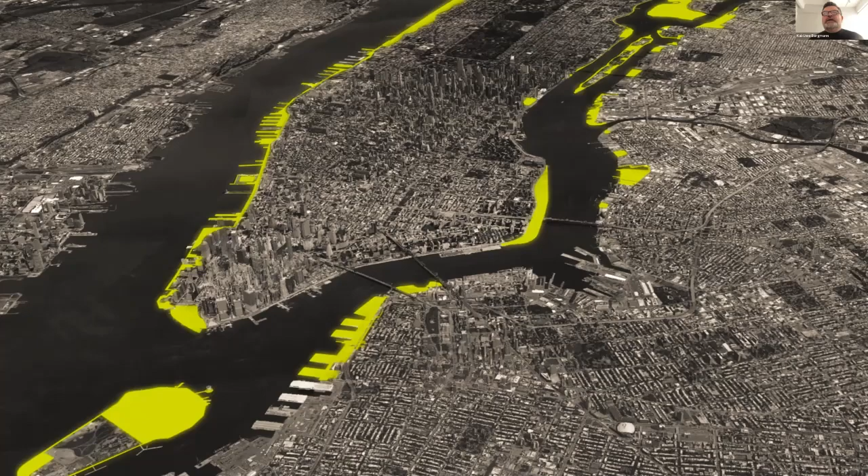Many of you may remember eight years ago when superstorm Sandy hit the city, knocked out power for many New Yorkers, and caused $20 billion of damage. We have since been asked to help design and protect the city against future storm events and climate change, so we designed a project called the Big U.

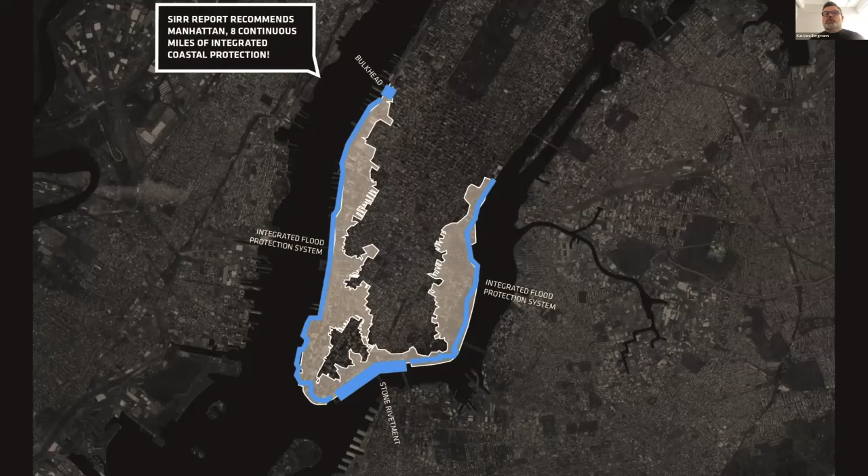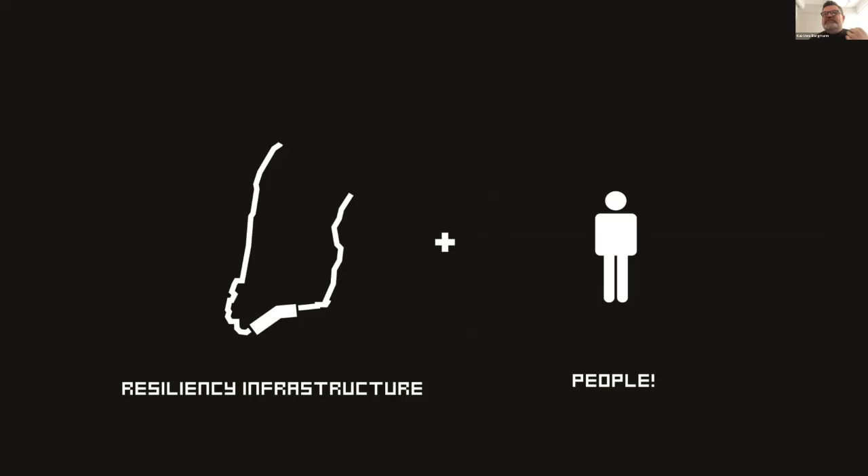Instead of only thinking of this as an engineering exercise of keeping the water out of the city, we want to think of how the infrastructure can also include the humans, the scale of the human, the activities of the human. So we call this social infrastructure—infrastructure that is keeping you dry, but also allowing you to enjoy life and increase the quality of life of the citizens.

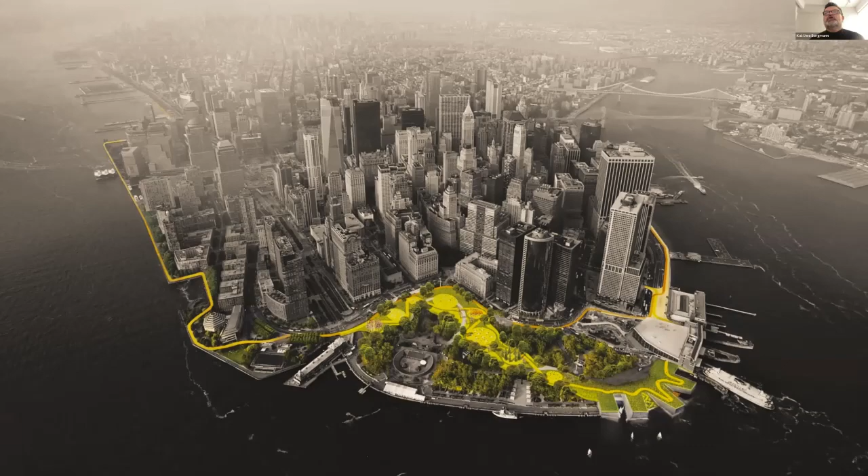Our proposal, which is 10 miles of protecting the New York waterfront, is also about enjoying that life. You can see here with the bike paths, with the park, with the rising berm which is protecting you against the sea. That is now a new way of actually engaging the waterfront, one that protects you against those events that occur from time to time.

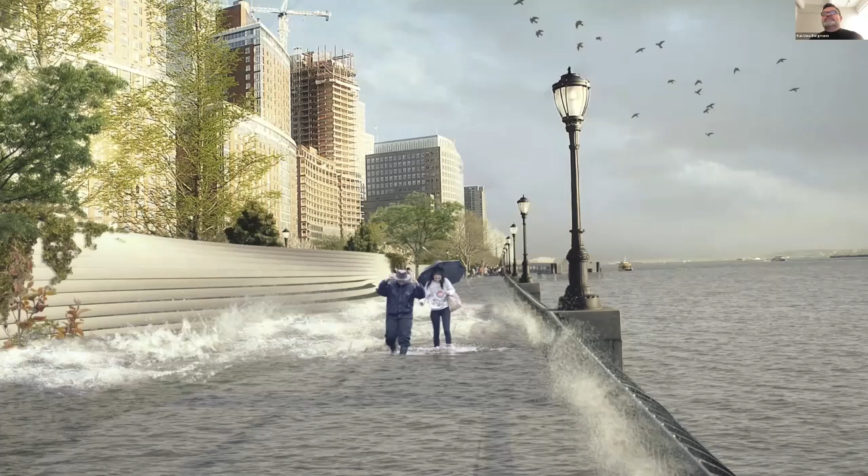And New York has actually, over the course of the last years, put this plan into place. So I'm very proud to say that the first 2.5 miles of the 10-mile protection is starting construction, and the city is making the investments in that future.

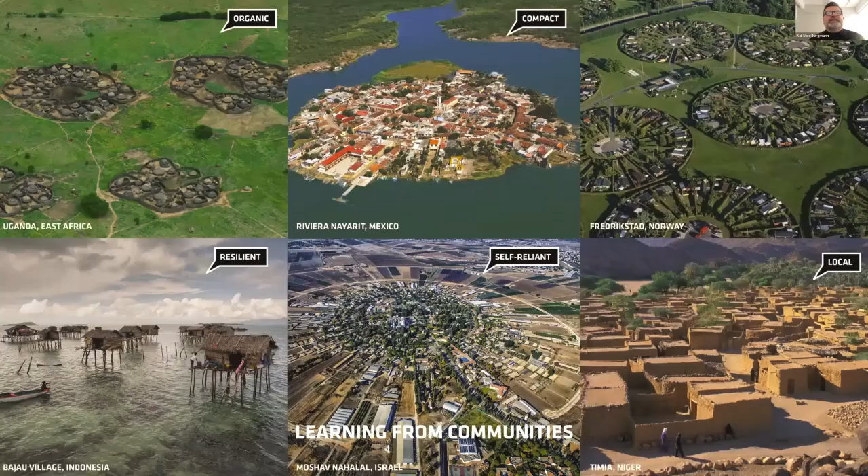We can learn a lot by looking around our cities, including Indonesia's Bajau village in the lower left. We can also learn a lot from nature about how to store water, how to passively evaporate water, and so forth. Inspired by the 17 Sustainable Development Goals from the UN, we started to think about how we can begin to imagine living on the water. When you start thinking about that, you have to think about the waste systems, the fresh water systems, the food systems. So by starting with a person, we begin to look at all of the things that are required.

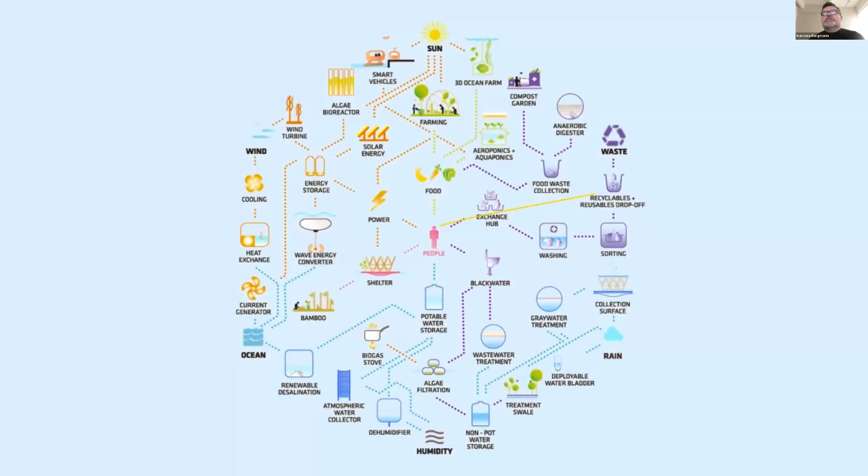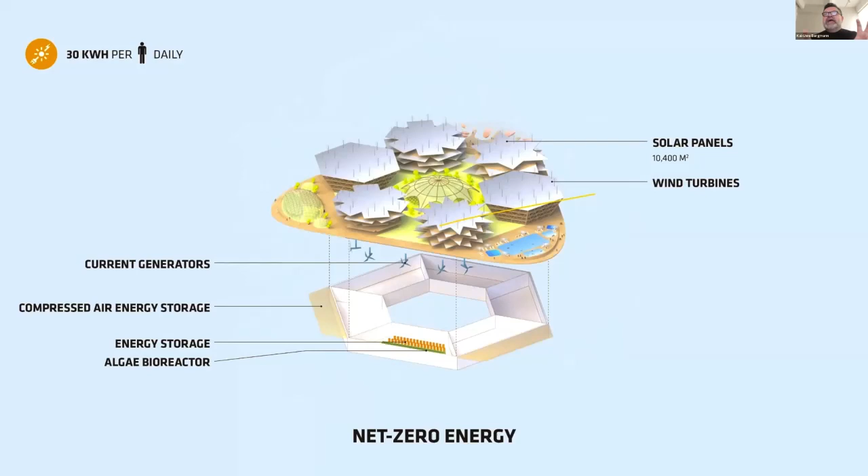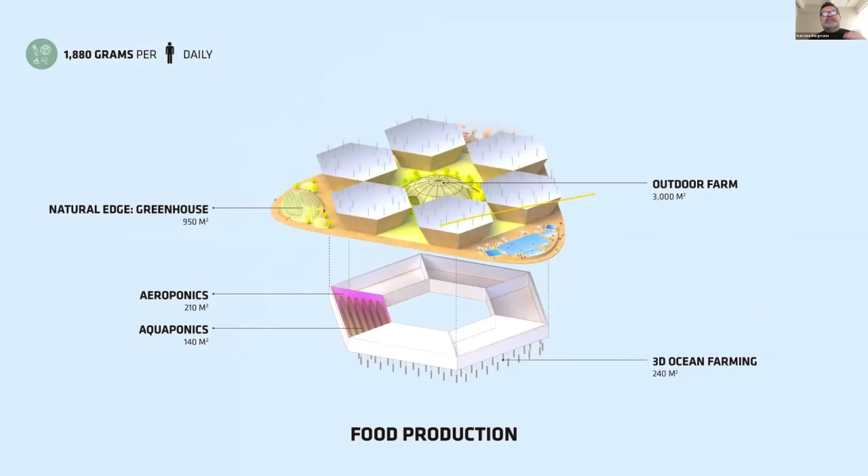So how can you create a circular economy, a circular way of dealing with requirements and everything else that's needed in order for you to sustain life in and around the water. We've designed a pontoon that is below the water, which creates the stability, and then a platform above that can collect rainwater and incorporate living gardens.

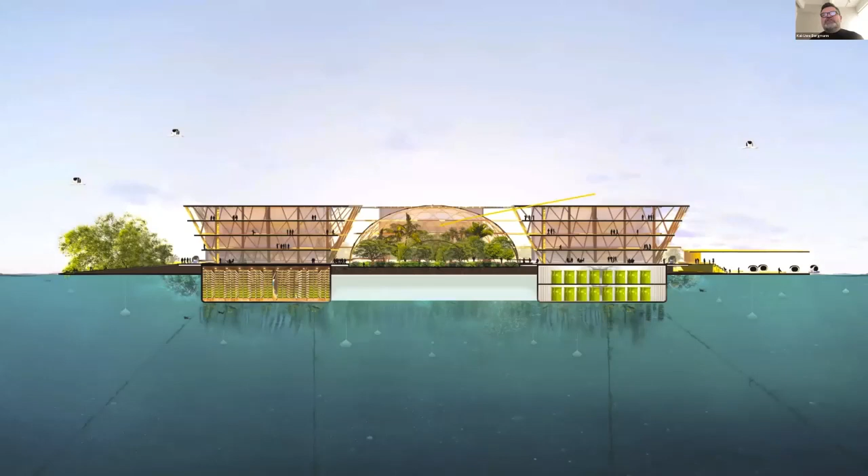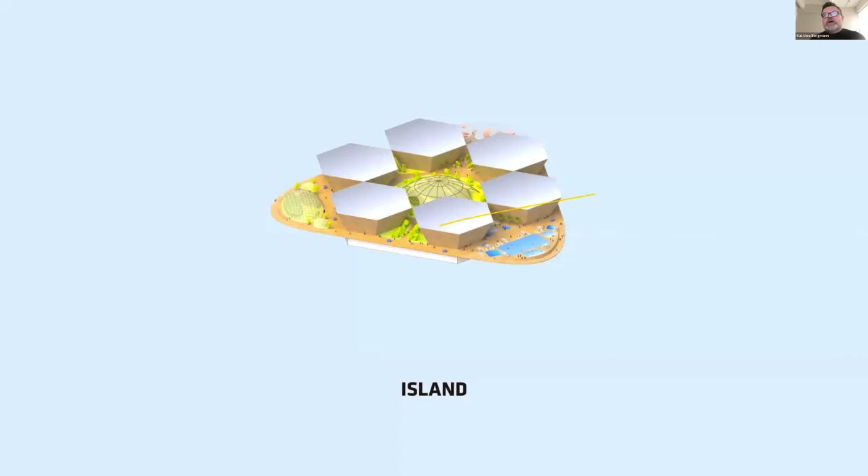Sectionally you can see how we imagine taking this idea to where you could have 10,000, even up to 60 to 100,000 people living within coastal areas, protected by bays, using innovations in farming and harvesting sea life to make life livable. The architecture allows for large areas of solar heat gain, and these pontoons can be arranged to create an archipelago where life could actually exist.

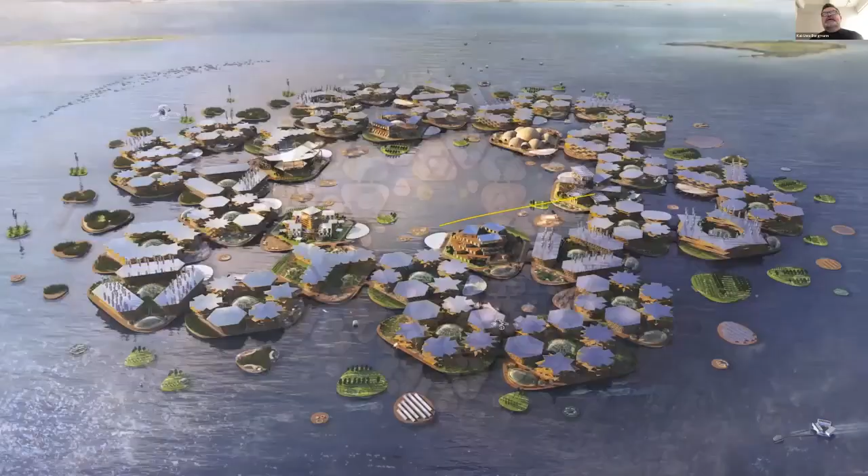So this is a project that was actually sponsored and done by the UN. I'm sorry, this is very strange, it just started over, so I'm going to quickly move forward.

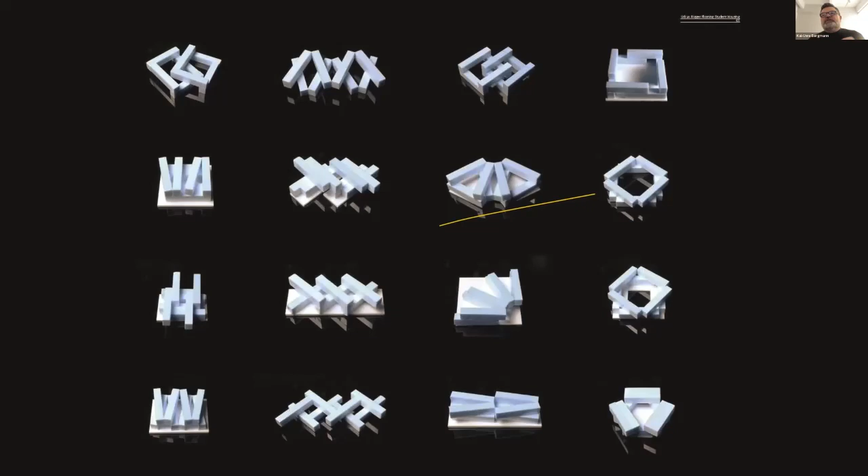This was presented at the UN Habitat Conference last November and is now in its first prototype. This is something we've already built in Copenhagen, the Urban Rigger project, which Peter is going to go much further into detail on. The concept of upcycling containers is nothing new, many people have done it before. But here was the idea of how do you arrange the containers to actually sustain and support the social life necessary to have an enjoyable place to live, work, and play.

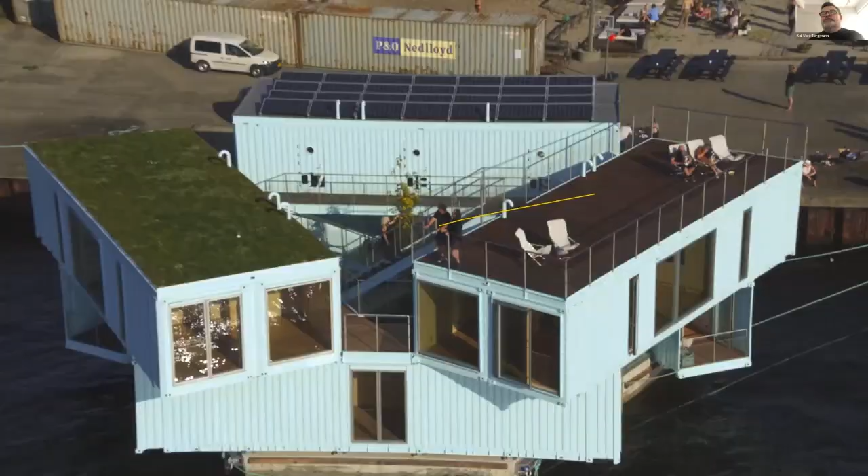So there's a built-in solar roof, a green roof that keeps the rainwater, and then an active social roof. There are, in this case, about 12 apartments, but we're also designing a 2.0 version with up to 24 apartments. These can be studios, but also 1 or 2 bedrooms.

This is an actual prototype built on the pontoon at a smaller scale of what the sustainable floating home can be. This construction can be built at about half the cost of a typical bedroom or apartment, and in one-third the traditional time needed to build dorm rooms or apartment complexes. So both from a building timeline and a cost perspective, it is very affordable.

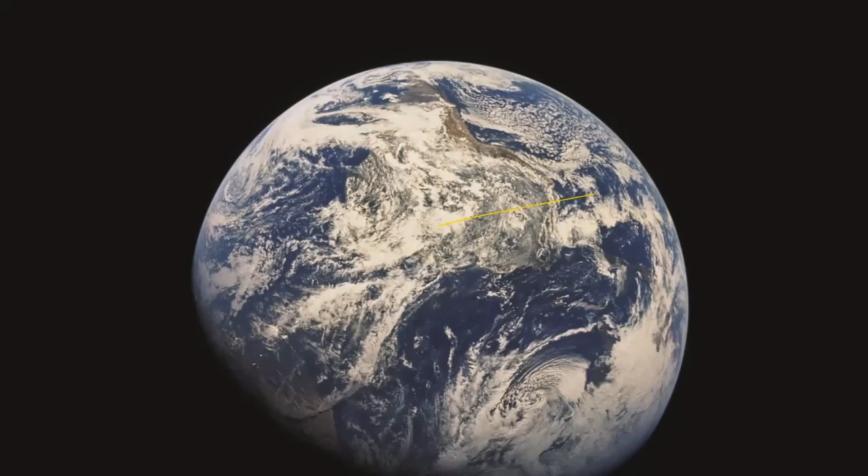So the city of Copenhagen actually ordered 5 more based on the first prototype, and now there are 72 residents in Copenhagen living on the water, in this case on a brownfield site. So again, the world is what we have, we need to work within those resources. And Peter is going to go further into the detail of what Urban Rigger is.

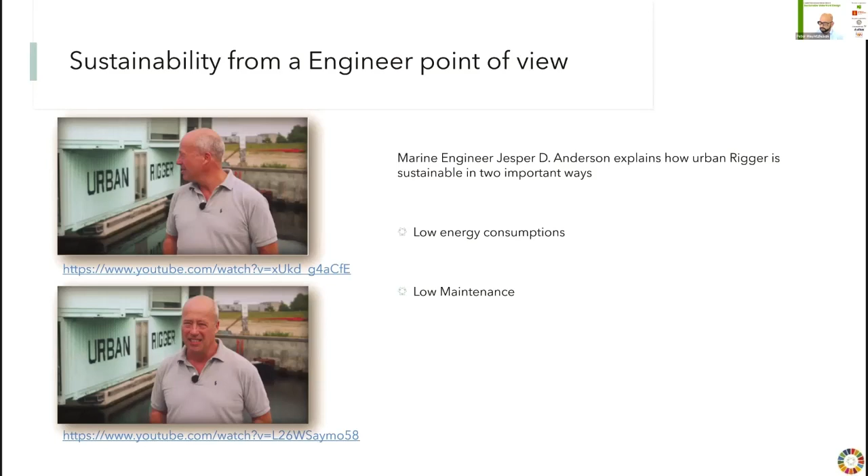It's important to say that we have proof of concept, proof of production. We want to see how we can get this holistic housing development across the world, and it's all about a process of understanding the need required in different locations and how we can develop this with other people.

This is all to be done together, because we are not the ones who will come and decide how things are to be built. We propose a technology that works for us, and maybe it'll work for you too. It's about integrating local workmanship to help design and build this.

Of course, we have the technology, but we want to develop this idea across the world—coming in to help educate and integrate local suppliers and workers into developing the Urban Rigger concept. At this point, we would like to offer this as a turnkey solution.

But it's all about participating. We are not alone in this, and we need support from everyone to find out what the real questions and requirements are. Again, community is a very important aspect of figuring out how to use an Urban Rigger.

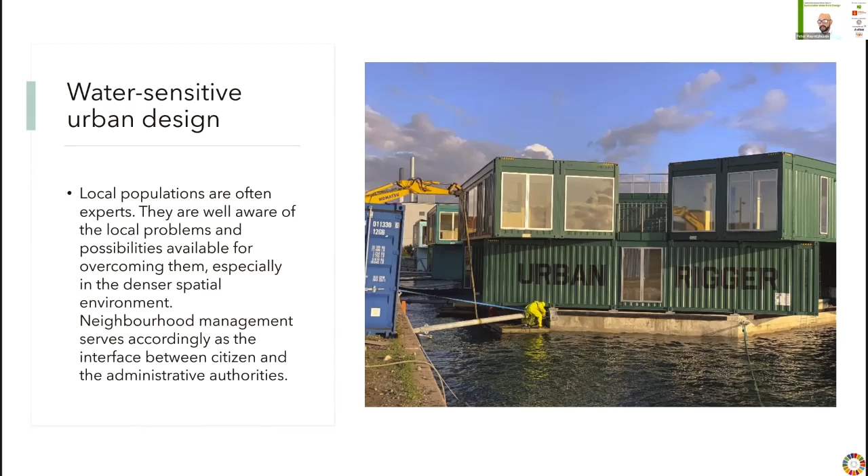It's very important to say that Urban Rigger is adjustable to rising sea levels. In Copenhagen, we designed them to the maximum required here, which is 1.5 meters of sea tide difference. This is part of the engineering, with special mooring arms for connection. It's also important to mention that the whole idea is scalability.

So our goal, through partnership, is the product. In our logo we use the phrase 'the future is floating.' We do believe the future will be floating, and that this will be required more and more. This is the manifest we developed from the idea of floating.

We believe we're flexible. We believe we are livable. We have an original idea. We want to make this affordable. We want to use the newest technology. We want to include the local people who will use this, and we want to bring new ideas. Last but not least, there's the good health that comes with the idea of floating.

To help us understand what we're working with, we hired an anthropologist, Nina Poulsen, who has worked closely with us since we started the rental student housing, studying how young people integrate into the Urban Riggers and build their own community living on board. We've also unfortunately found ourselves in the situation of COVID-19, because 50% of our students are from abroad and 50% are from Denmark.

That means when you move to a new city and get locked down, as many of us are experiencing right now, it can be very difficult when you're far from home. I believe this community has handled that at a very good level for us.

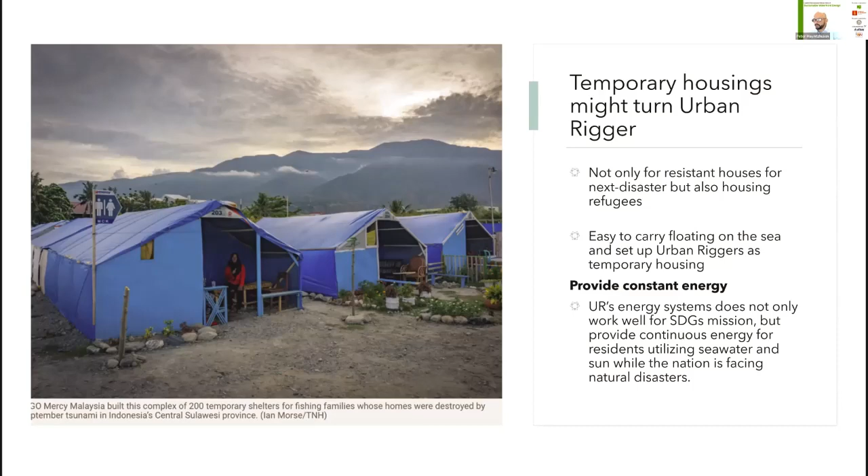Designing the new rigger 3.0 - 2.0 and 1.0 consisted of 8 apartments. The new design will have 18 apartments, and will have a living space area of 23 square meters per apartment, which is 417 square meters per area.

You will also have the common areas underneath the water, which is 257 square meters. And then you have all the exterior areas on board a rigger, which are the courtyards, the galleries, and rooftops, which is 323 square meters.

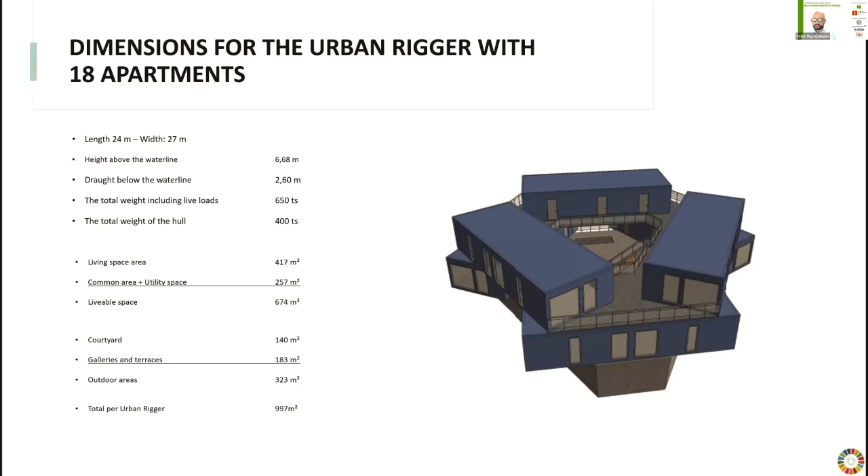A very good description here shows how an urban rigger is designed so you can connect 2 urban riggers into 1 urban rigger, making this very simple. It's also what we're working on: a modular design, making it much easier to finish off, and production working much faster, being able to deliver a complete urban rigger within 2 years, and hopefully we will be able to get down to 1 year for the urban riggers.

It's also very important to integrate an urban rigger with the community, and how you can use the space connecting, first of all, the community, but also connecting one land side to another land side for the public to be able to access one area.

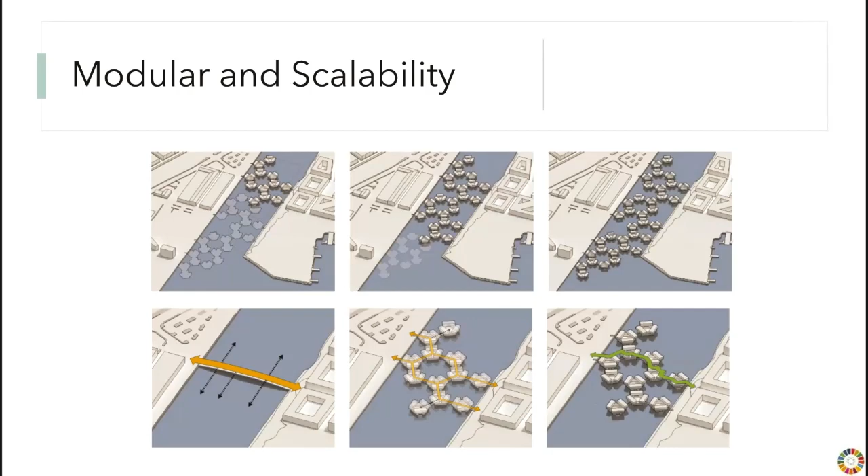We believe we are the solution, and we do have the ideas of durable structures that withstand extreme weather, and we believe that we are going forward with new climate handling.

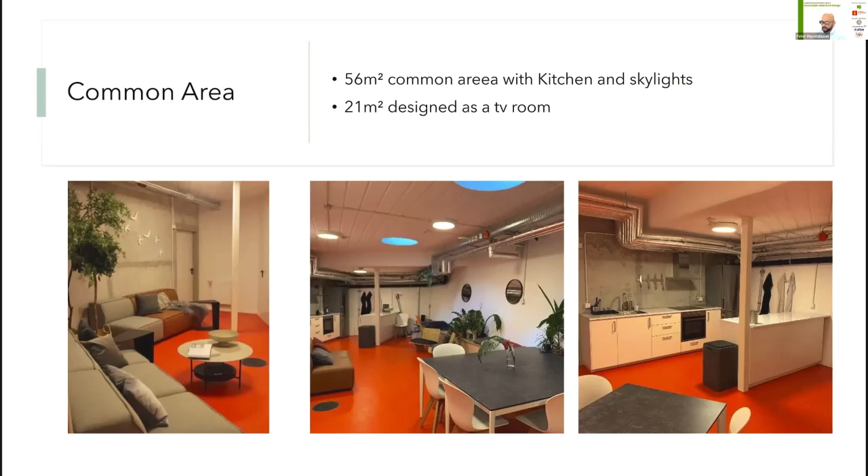This is the area under the water, the utilities, the washing rooms. We have the exterior areas where you have access to the water directly.

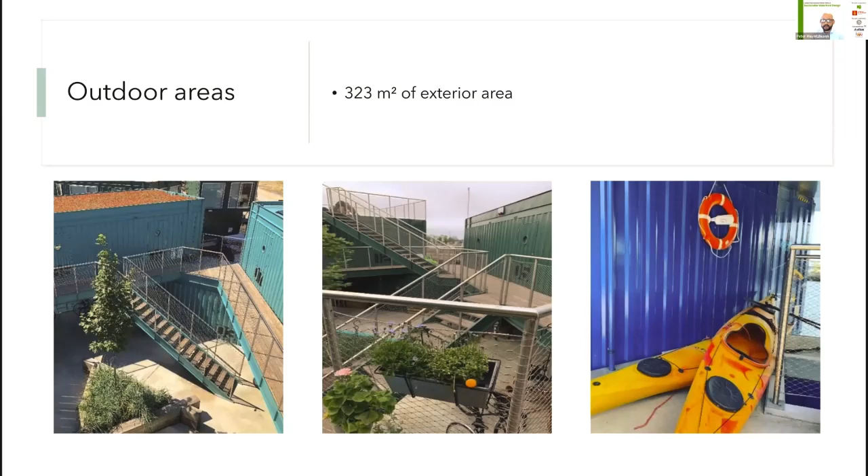These are the projects that we're working on in Copenhagen, where we are trying to make Copenhagen the capital of architecture in 2023. We hope we will be able to deliver the first floating city in Copenhagen, or even better in Indonesia. I think it would be much fun to participate in this.

Our project pipelines are very large right now. We are working on the east coast of the States, the west coast of the States. We're looking at homeless housing, orphanages in India, and housing in Panama, Australia, Singapore, China, England and Germany. So we are very occupied trying to get out across the world, but unfortunately we have been restricted from traveling for quite a while, like everyone has been.

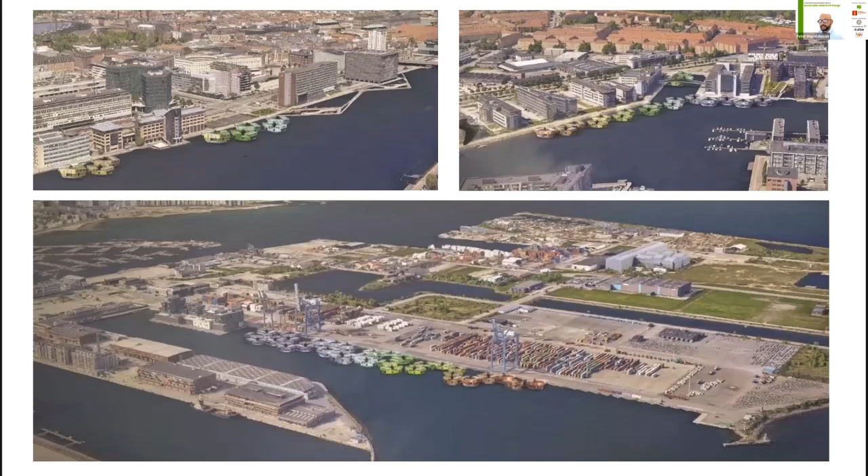This is how it looks in Copenhagen. We have 6 urban riggers placed here, with 72 apartments and 100 residents living on board the urban riggers. This is just an idea that we believe should be global instead of local.

I'd like to thank you very much, everyone, for listening to me, and I hope it gave you an experience of what urban rigger can and will be. And I'll stop sharing.

Thank you so much, Peter. It was very inspiring and looks fantastic, also from the interiors, but also outside. And I see a lot of potential of it being implemented in Indonesia. I look forward also to the questions from the audience.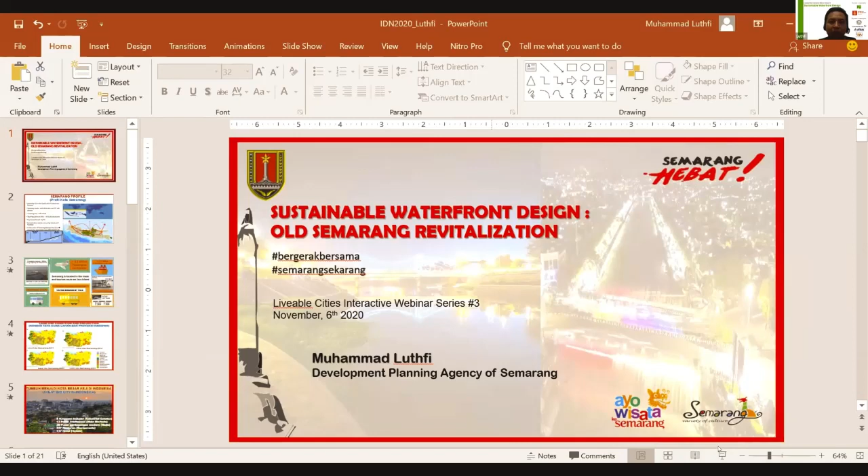Waterfront design is not only a place to live, but it is also a way of living. So that is what our city is doing right now. It's still in progress. It's called the old Semarang revitalization.

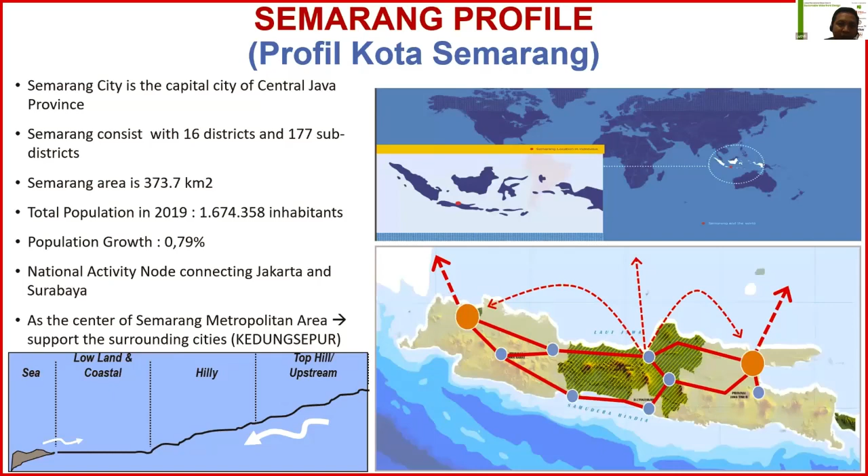A brief explanation: Semarang is in Indonesia, in Central Java, one of the capitals of the provinces in Indonesia. We also have a strategic position in the middle of Java Island, in between the two biggest cities in Indonesia, Jakarta and Surabaya. So automatically Semarang's development follows the development from those two big cities.

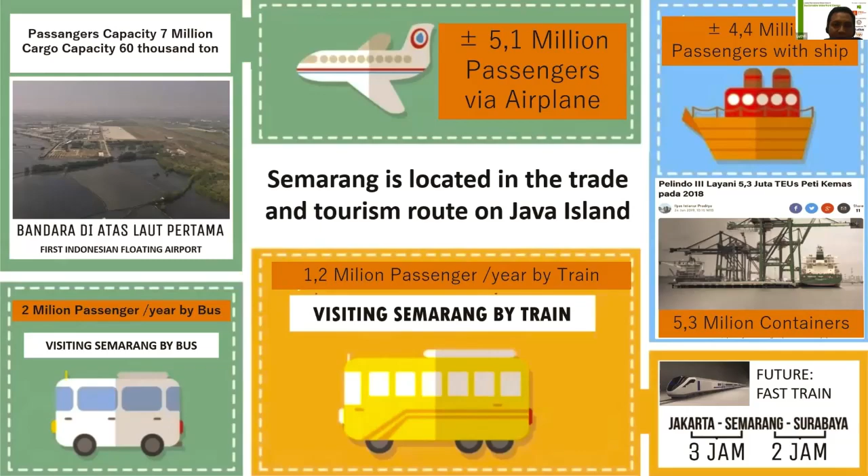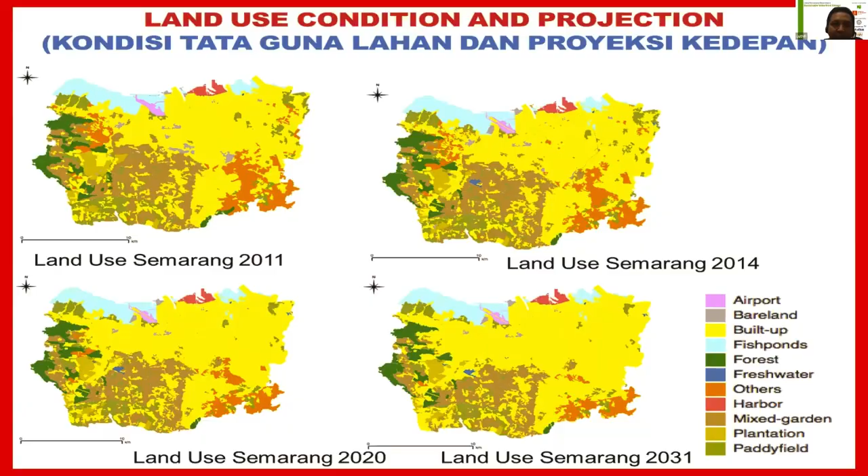A little bit about the land use condition: you can see that almost all of Semarang is now a built-up area, and we are facing so many problems. In the northern part of the city we have the Sea of Java, which is our constraint to develop the city, and we also have the hilly area in the south where we have limited development upstream - otherwise the water coming from upstream to downstream will be a disaster. Semarang has become the 5th biggest city in Indonesia, after Jakarta, Surabaya, and then I don't know, maybe some people say Bandung or Medan, and then Semarang.

It is typical of a third-world country city facing problems because of unbalanced development. So the need for space is very high, but on the other hand we also have a lot of natural limitations.

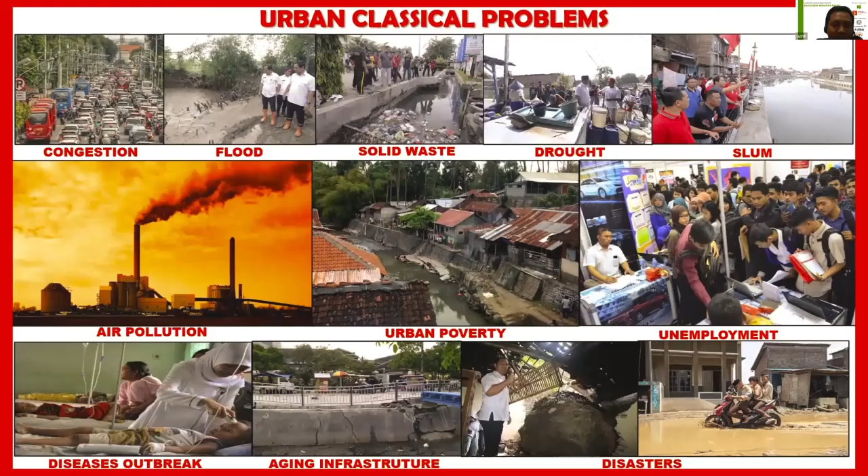And then also another problem related to the cities is classical problems like congestion, floods, solid waste management, drought, air pollution, water pollution, poverty, unemployment, disease outbreaks, aging infrastructure, and also disaster.

In the rainy season we actually have an abundance of water, so some parts of the city still flood. But still, some parts of the city face a lack of water, especially in areas not supported by the city's pipeline.

You can see this is only the periodic historic flash flood in Semarang. So we actually have two characteristics of flood in our city. The first is flash flood, because we only have less than 15 kilometers from the upstream to the downstream, to the coast. So the water comes very fast. West Flood Canal in 1990 was a very big flood, the biggest in the modern history of Semarang.

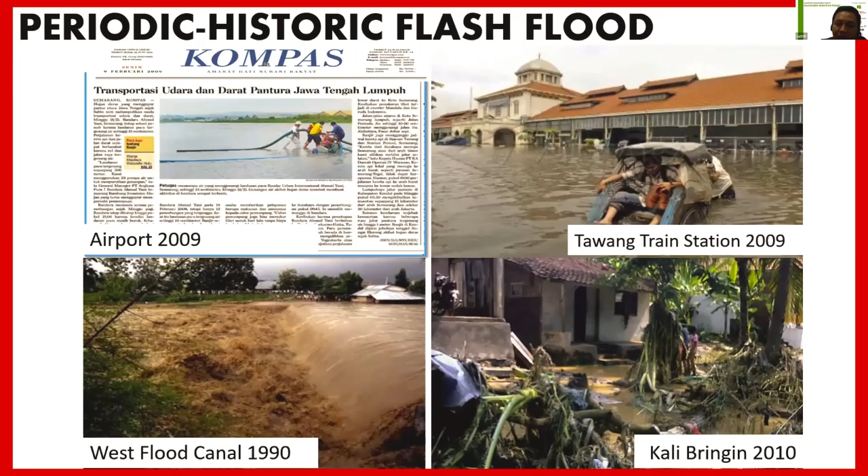That's why we try to have a comprehensive flood management system, with access from the sea controlled by the sea dike, and we build a retention pond nearby the dike to hold the water coming from the upstream.

Otherwise, if we don't put it in the retention pond, the water will flood the housing or commercial areas near the coast. So from the upstream, we put the water in the retention pond first, then pump the water and flow it into the ocean.

Because this is very complicated, maybe in this discussion I will get new insight or new technology that can solve our problem. Otherwise, this is the best method we know until today: control the water from the upstream, and keep the water upstream as long as possible.

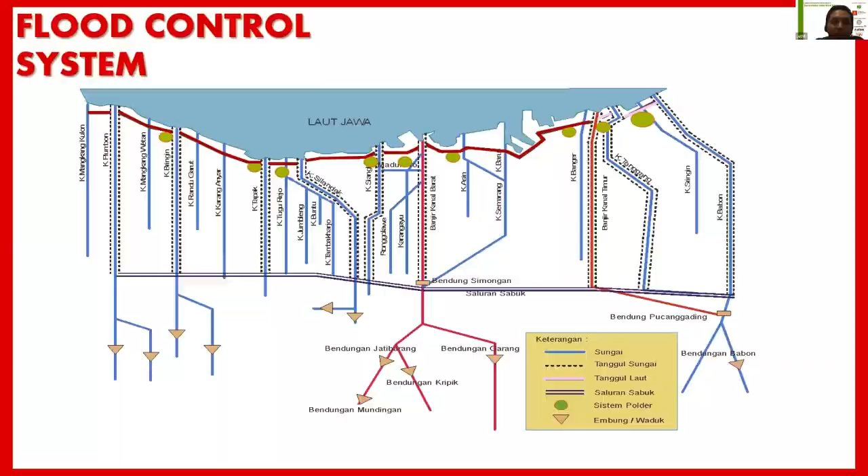The way of living in harmony with the water actually has a very long history in the past, in the colonial era, when we wanted to bring back the glory of Semarang by utilizing the water for city life and city economy, so we can grow and develop the city.

But that was in the era of the colonial period. After the independence era, some of the canals made by the Dutch were not utilized very well by the city government, and problems arose from canals that in the past had great potential. Nowadays they have problems with pollution, sanitation, and waste management.

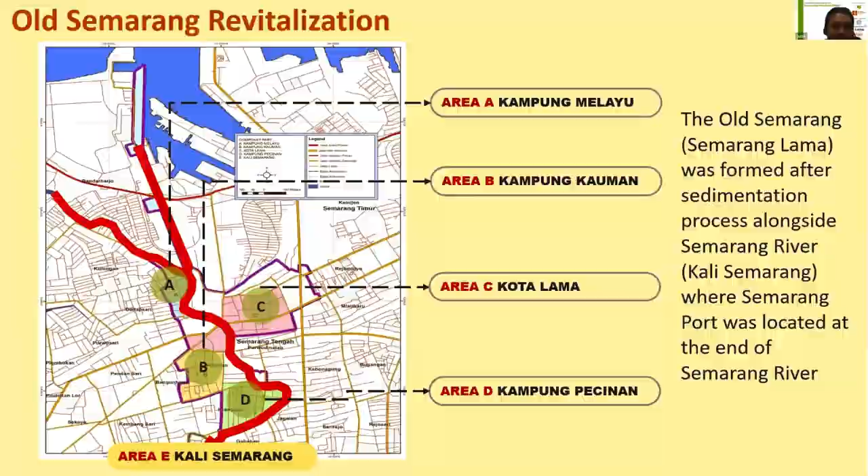So it's only a small preview. In the past, the Semarang River had an important role, so you can see that the form of the city is following the path of the river. Everyone lived nearby the Semarang River, or Kali Semarang.

So the current situation: the canal or river, you can see the picture, is full of illegal housing, and full of waste, and it's not really well managed. We have more than 8,000 meters that we have to do something with these rivers.

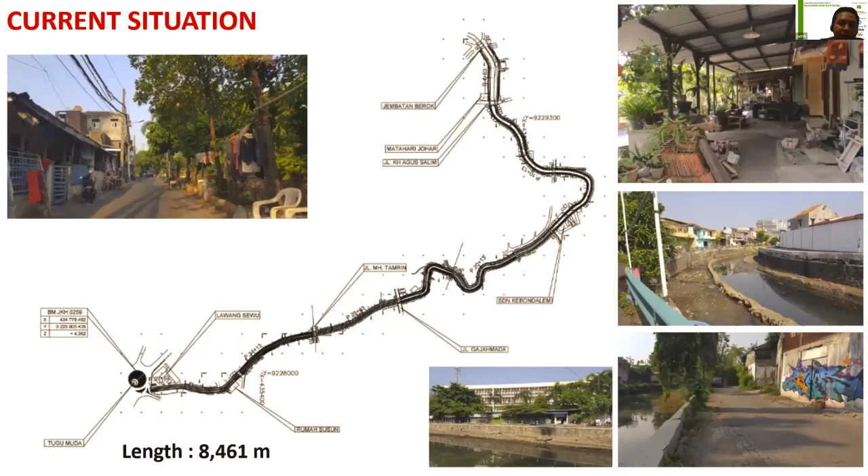Starting from 2014, I think, we tried to redesign the revitalization of the Semarang River from the starting point or upstream until the downstream, or until the coastline. You can see the design from each spot of the area nearby the Semarang River.

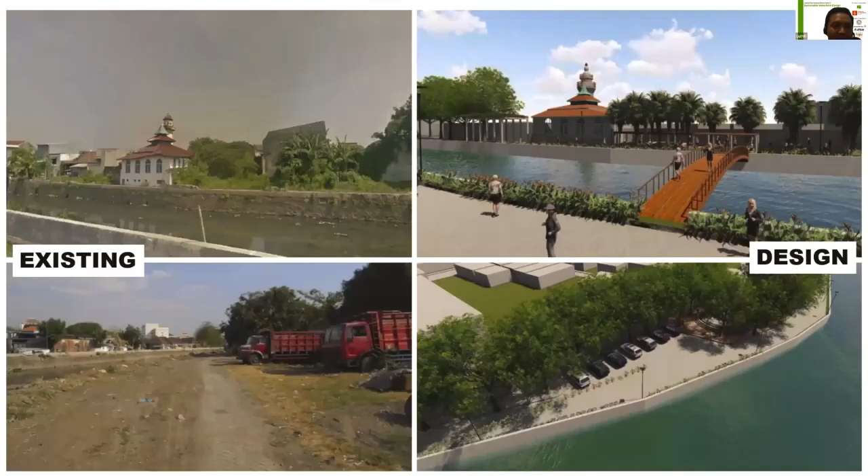You can see the existing condition, the situation is the river is not functioning properly. There is no people activity there, on the left side of the presentation, and it became like old vehicles that are already broken, put nearby the river. We want to make it human friendly, so everyone can do activities there.

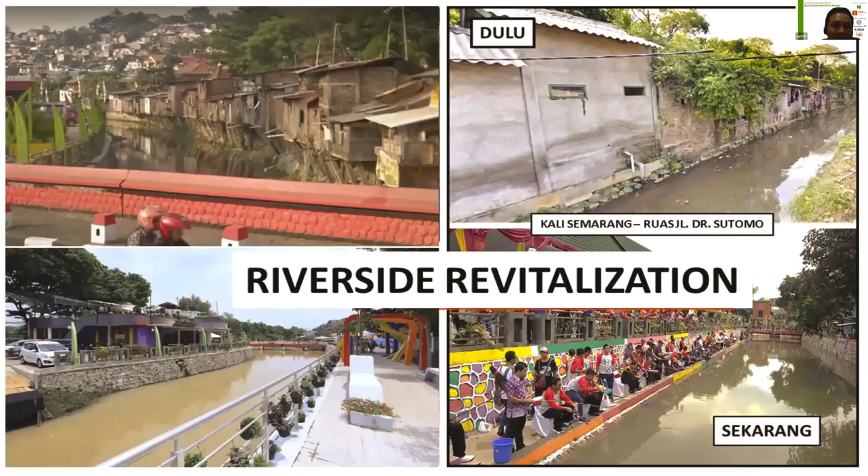We already started on more than 8,000 meters. On the left, you can see the previous situation, with so many illegal housing alongside the river, but now we already moved the citizens there and reallocated them to our vertical housing. Then we succeeded in creating new open space alongside the Semarang River.

On the right, you can see the back wall of the housing, where everyone threw their solid and domestic waste into the river. But now we've changed the situation to become more friendly for human activity, for tourism activity in the city. The next is behind the city hall, our office.

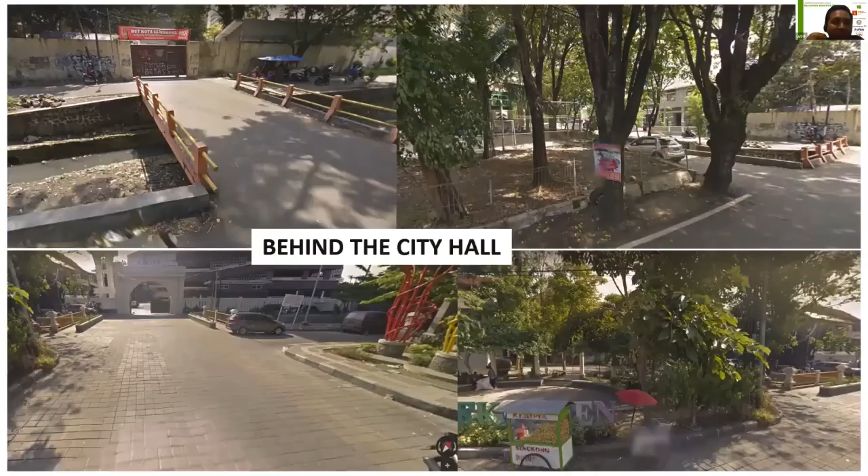Previously it was like a slum area, a dark area without any attraction there. But now we've built some open space, done rehabilitation to the road, and added accessories alongside the rivers. So now everyone can enjoy the river, it's very fun.

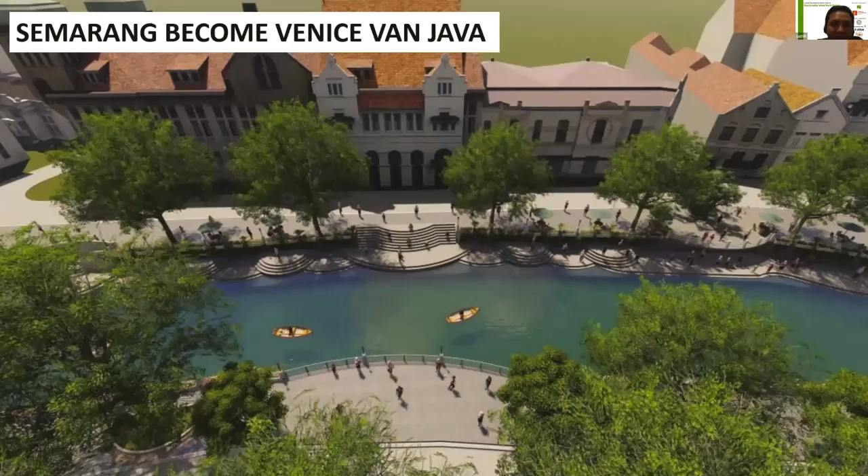The highest goal, as I mentioned before, is that it's not only a place to live, but we want to create a way of living in Semarang, living in harmony with the water. So it is our goal to try to utilize the water, to become at least like a Venice in Java, with clean rivers, not polluted by domestic or industrial activity. That is the goal we want to achieve.

And it still needs support, not only from the local government, but also from the national government.

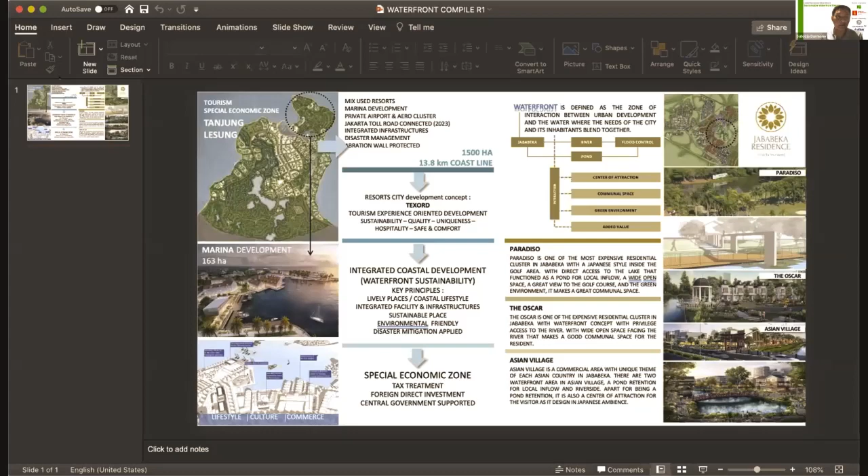Thank you, please let me share a presentation of my own. Okay, can you see the screen now? It's perfect, sorry. Okay, it's clear, right? But I cannot hear your voice though. Yes, it is clear. Okay, I couldn't hear your voice just now. Okay, hello, yes sir. Please continue, yeah okay okay.

So I think I would like to share this very quickly. I tried to pack everything into one page, but this is basically a presentation that showcases two different townships. One is based on resort on the left, which is Tanjung Lesung, the special economic zone, and on the right side is a township that we have in Cikarang.

I think very much what the previous speakers have presented is very much in line with what we have here. Some of those issues being faced, for example in Manhattan with the seashore and everything, it's the same case for our Tanjung Lesung area, where we try to do abrasion wall protection, which is actually really on the tipping point. Basically Tanjung is an Indonesian word for peninsula, so the tipping point of that peninsula is a very prone area for disaster. So this is a bit like Manhattan.

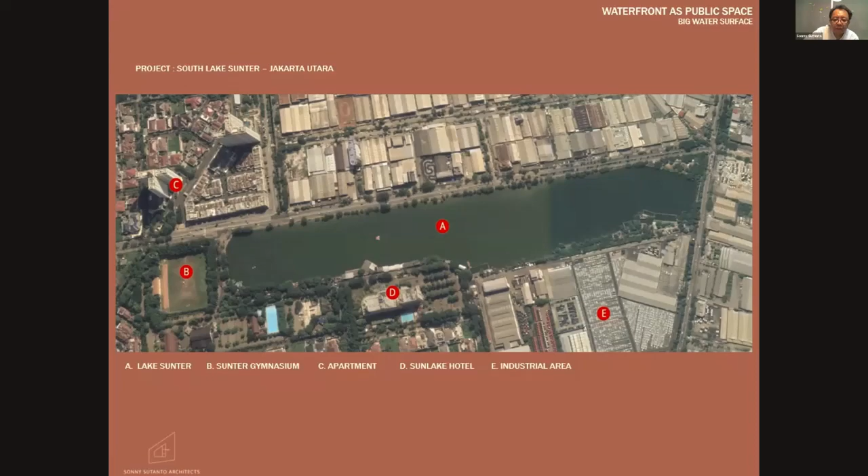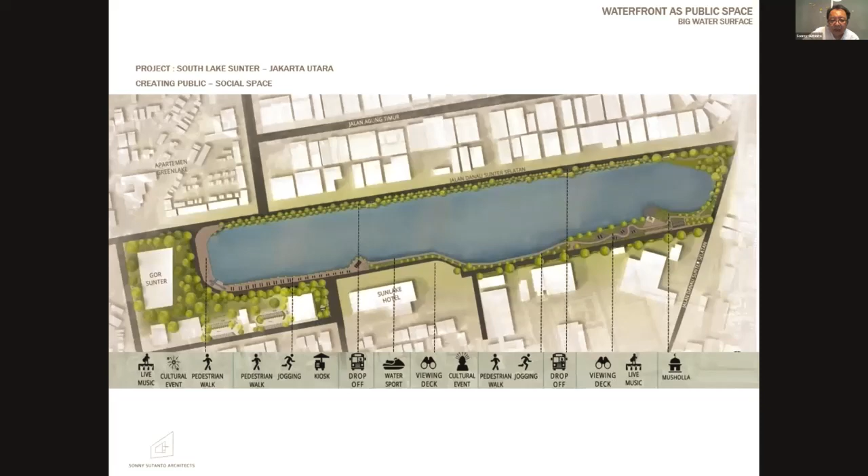Yeah, this is what we have in Sunter area. Basically, we have a very big reservoir neglected. This is close to my house area, very much neglected because this is a factory area, a lot of storage area. The embankment of the water has become very, very bad. What we have done is we asked the government to do pedestrian close to the water, and the government agreed. Pedestrian is changed. This is the situation before. You see, basically on the left side, left drawings, the pedestrian is very close to the street, to the road, to the big road.

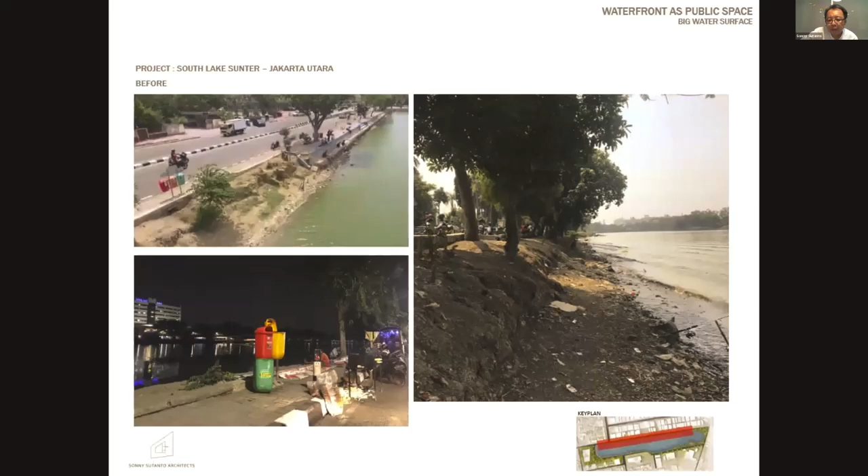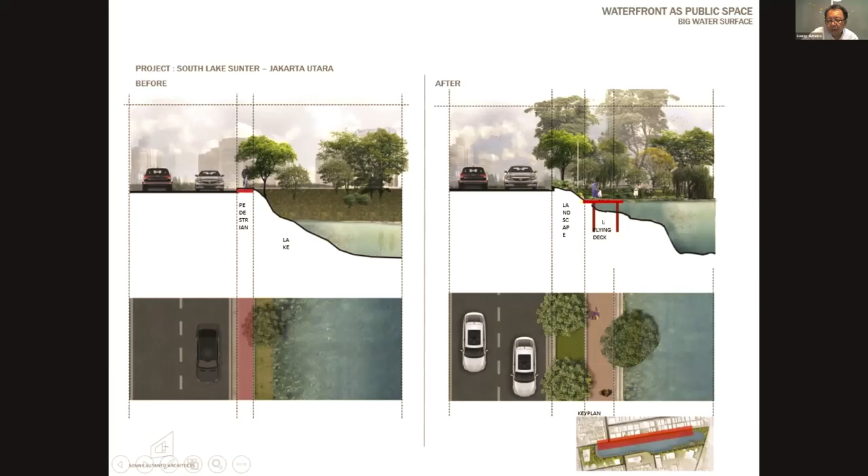What we propose, and the embankment, you see, this is typical embankment in Jakarta. Whatever you have, we have dirty things like that. People will throw garbage into that area. What we did is a very simple device: we move the pedestrian on the left drawings into a bigger pedestrian area close to the embankment, close to the water. It works very well. Now it becomes something like this on the drawings.

This is also showing what it was before. You see pedestrians—if the pedestrian is too far from the water, people will not use that as a waterfront. We need to be very close to the water to do it.

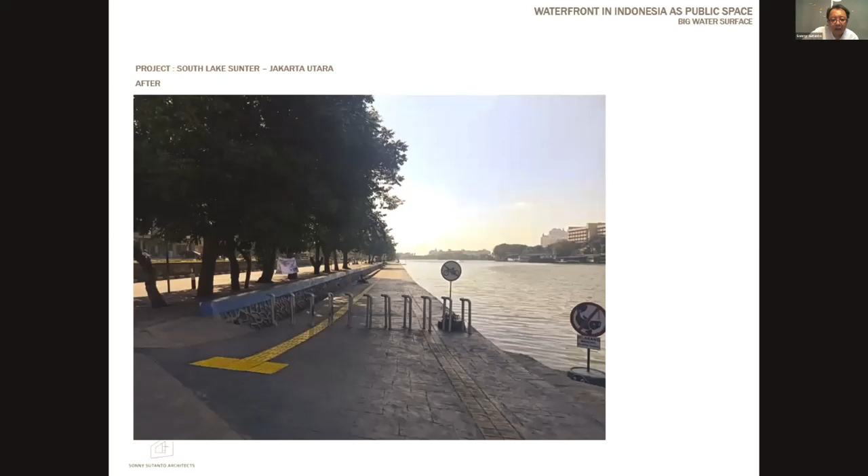This is what happened now, and nowadays people don't throw garbage anymore because the design is cleaner. People either feel shy or don't want to litter because this has become a public space area. This is a jogging track, clean not just because of daily cleaning, but because this is now a day-to-day situation compared to before.

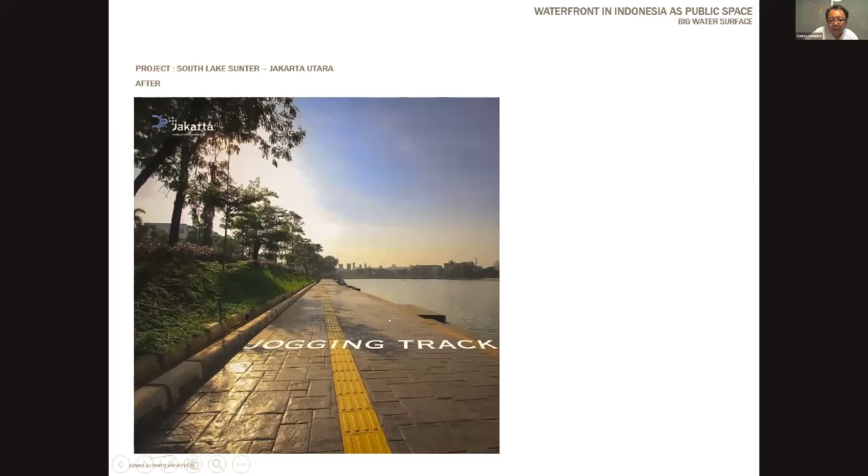Before, the pedestrian path was on top. What we did is basically move the pedestrian path lower, closer to the water, and we also created public spaces.

For two things, we mentioned to the government that in areas of conflict—and there's a lot of conflict in Jakarta—two things can make people stay together without any barrier in between, whether because of religion, language, or whatever. Those two things are sport and music.

I think it's going to happen after COVID. The COVID issue will also need to be addressed because right now public spaces have become places people try not to go to, and there's also a ban on using them in very densely populated areas.

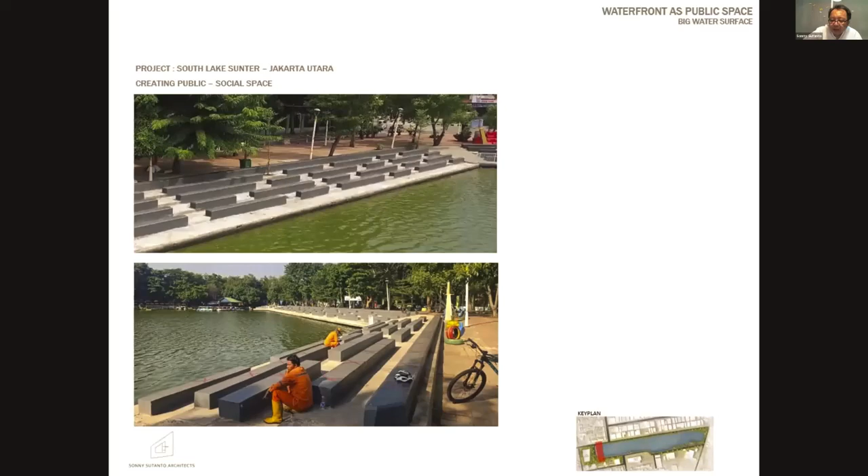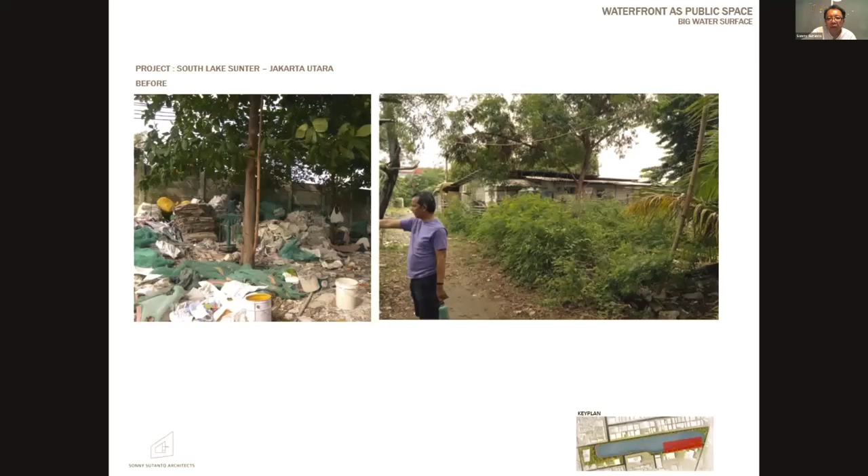This is what happened, Sonny—yeah, Bu, can you end your presentation? Yeah, okay. Basically, what we propose is that what happened in Copenhagen can be done here too, if the water is clean.

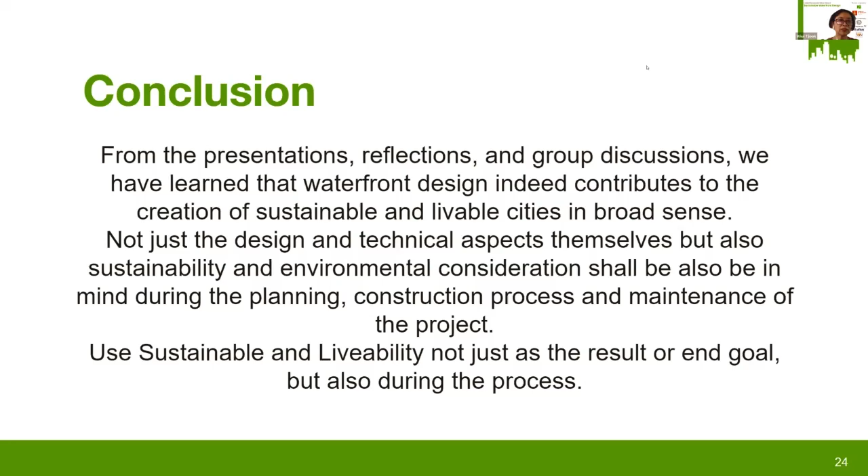I would like to thank everyone for their contributions to this interactive discussion. There are so many aspects that I have learned today as well, and I hope that with the presentations from Kai-Uwe, from Luthfi, and from Peter, as well as from Pa Sonny and Pa Sutedja, we will be able to create more livable, sustainable waterfront designs.